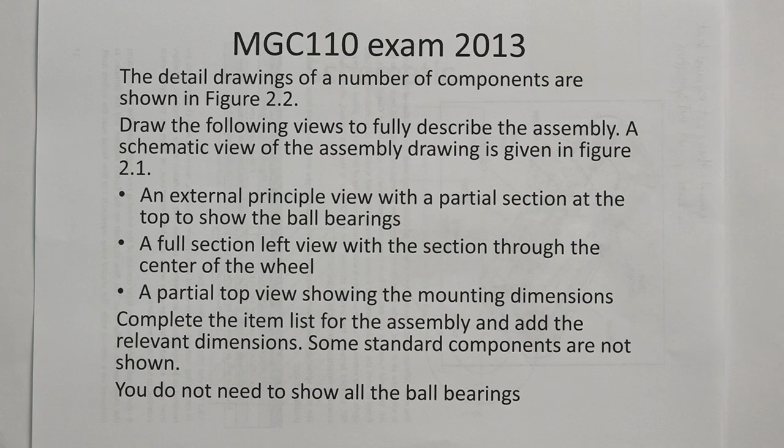Assembly example from exam 2013. So in this question they asked for an external principal view with a partial section at the top to show the ball bearings, a full section left view with a section through the center of the wheel, a partial top view showing the mounting dimensions.

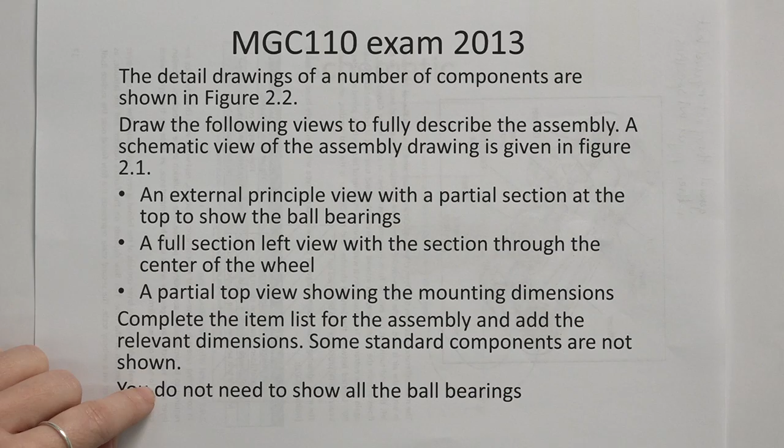They also say complete the item list for the assembly and add the relevant dimensions. Some standard components are not shown. You do not need to show all the ball bearings. Okay, so what you receive also in this exam is a schematic view of how the layout will look.

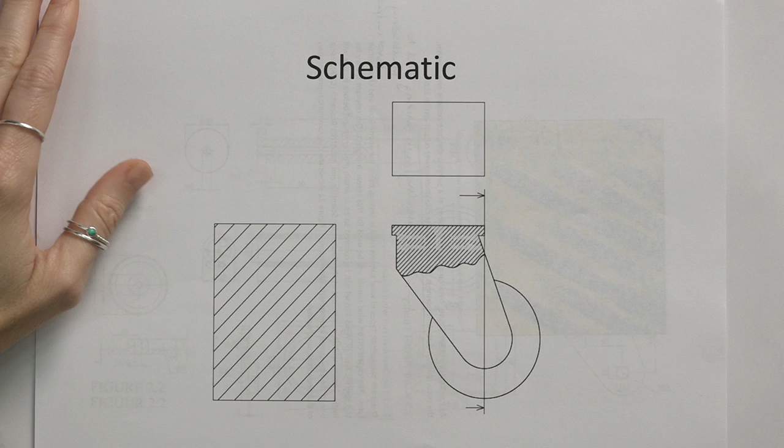So you'll have these three views that they ask for: an external principal view with partial section at the top to show the ball bearings, a full section left view with the section through the center of the wheel, so that's how they indicate where the section needs to be, and a partial top view showing the mounting dimensions. So these are the three views that we need to draw for this question. So we'll use the schematic throughout, and I'll show you how we do that.

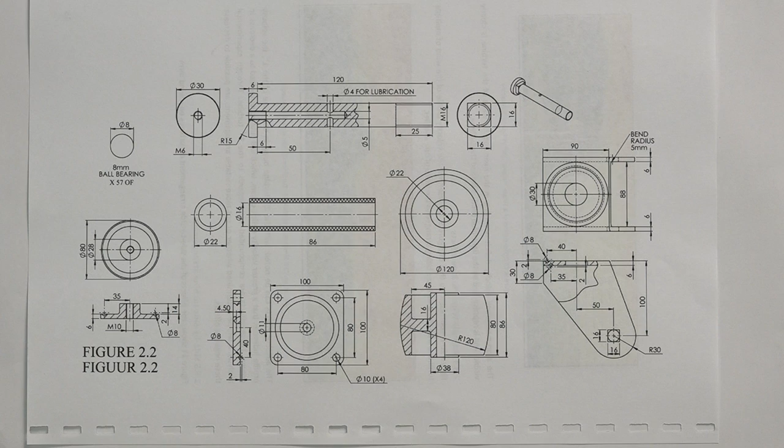But let's look at the components that we have. So the components that we have are the following. We look at the components given to you on the question, but it's important before we start to see how they combine together to identify which components belong to which components. Remember, they're always given in orthographic pairs, so either a single view, two views, or three views are given for you to see and have an idea about how these components look.

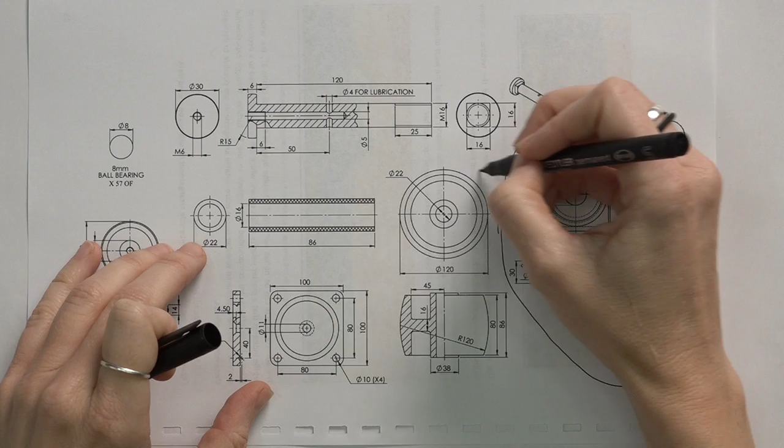So if we look at this, we can say that these two components are paired up, and they are paired up because we can see orthographically they all line up, and there's nothing to this side that lines up with them. So we have one component here. We have a second component here. And so you continue to make sure that you know how many components you have. Okay, this is just the ball bearing on its own.

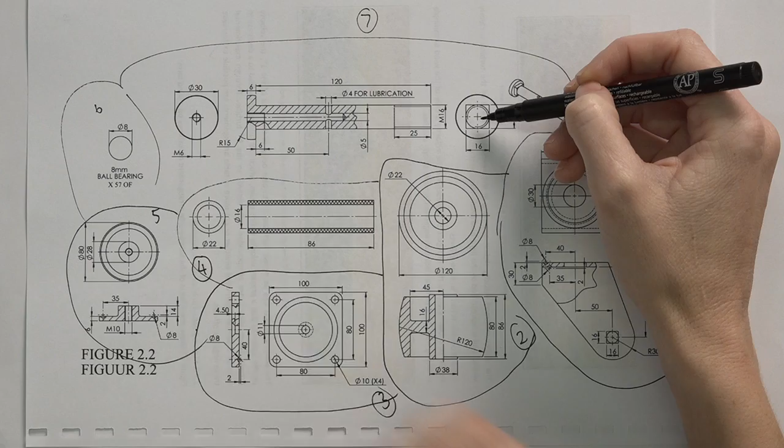And then this piece gives you an indication of how this shaft pin component looks. So it actually gives you a side view, a top and a bottom view, and it actually gives you an isometric to show you the detail of how that pin looks. Okay, so now that I have identified my different components, the second thing I can do at this stage is to say, are there standard components that I can identify that will be part of this assembly only by the components that I have?

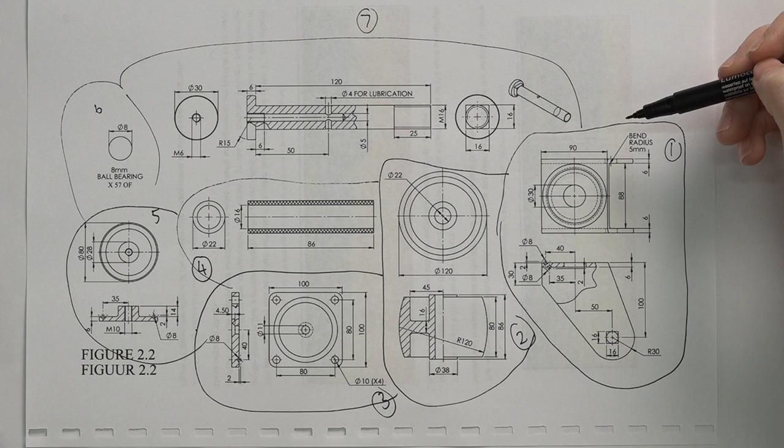Now, remember, there's a couple of things that we look for, and in this case, if we look at this pin, we see that they have lubrication holes coming from the top of the pin, which immediately gives you an indication that there will have to be a grease nipple as part of this assembly. On this side, I have threading, M16, so it might mean that I have a bolt on this side, but that's not necessarily clear at this stage, but that can be part of the picture.

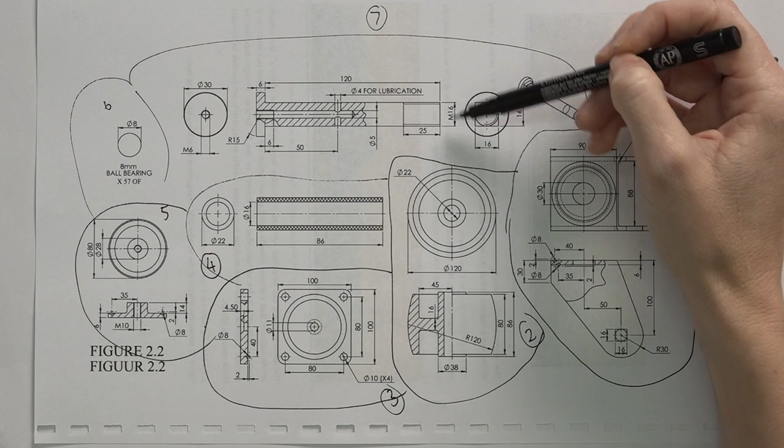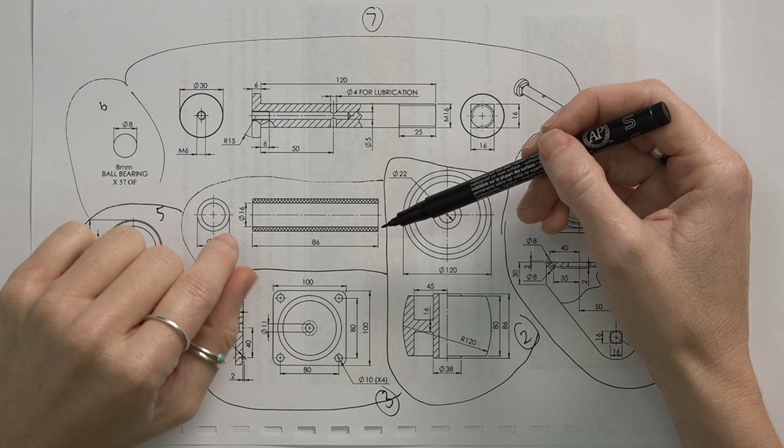But definitely I will have a grease nipple that will allow for grease to be put into this and run out through this component. Also, when I have a component where there's a pin and a grease nipple, the component that I know is associated with that is also a bushing. So most likely, just because I understand my standard components, it means that I have a bush that runs over this part of the component, and around the bush we will have a wheel.

So these are things that we can immediately say without even looking at the sizes and the dimensions of these components, that they will probably be connected because of how we understand standard components. If this is not clear to you, I would strongly suggest that you go through the tutorial about standard components again to make sure that you understand what each of these components needs.

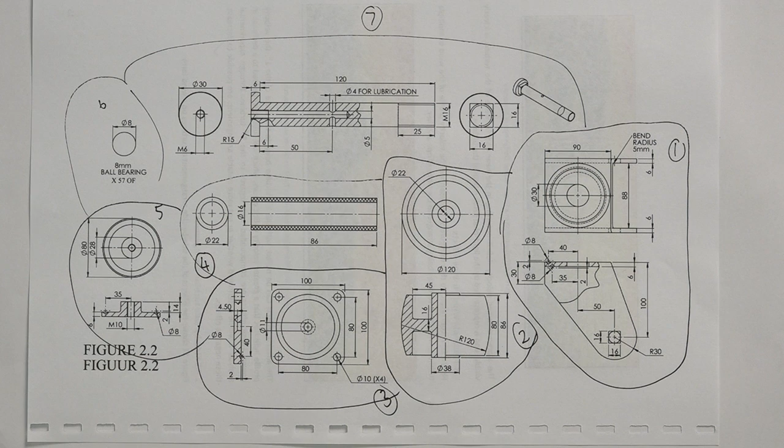Okay, so we can start at any place in the assembly, with any component. But before we start, we want to at least have an idea of how they fit together. That's what the schematic is for.

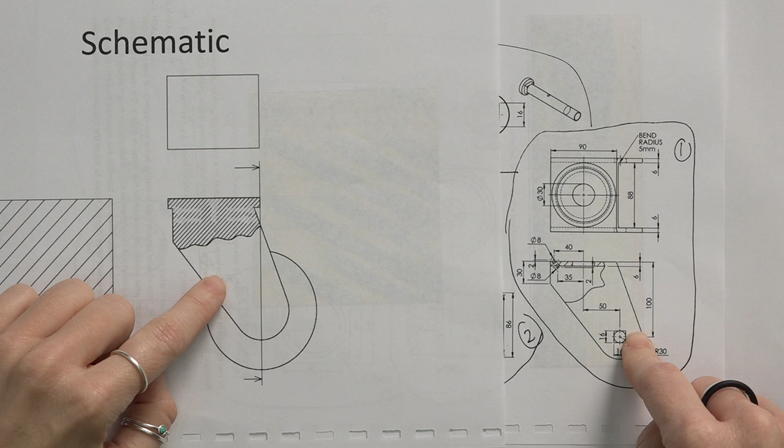The schematic gives you an idea of how the components fit together. In this principal view, you can see there's this outside housing and this wheel. If you look at this component, it's exactly the same as this, so we know it's most likely the same component. Then we have a wheel component that we see over here. We can already identify that these two will line up through this hole.

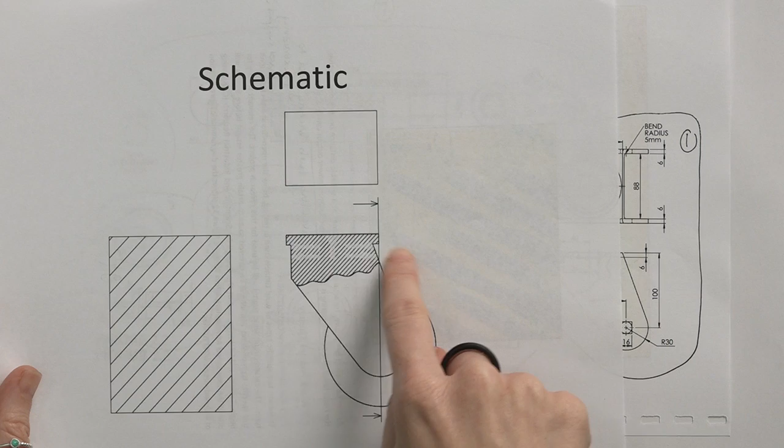At the top, we see there's a specific feature. But remember, this is also just a schematic, so this can be misleading. In this case, that will indicate something else to us, but we'll continue and see what that means later on.

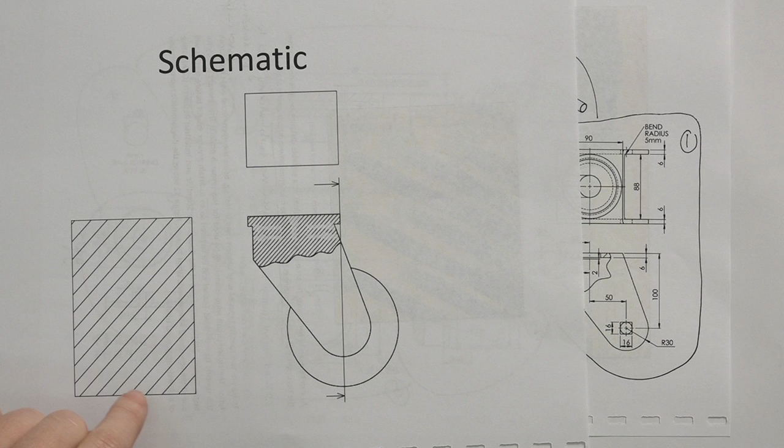Okay, so I know there's a wheel and this housing, and the section line is running through that. Remember, if I look at the mark allocation for a drawing like this, the largest portion of the marks will lie in the section drawing, so it's advisable to start first with the section drawing. I know the section line runs through the center of the wheel.

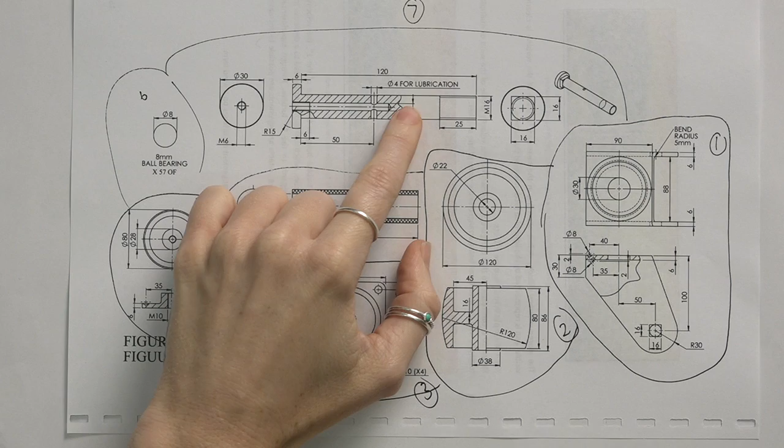So what do I know about the wheel? From my standard components, I know that inside the wheel I will have a bush and the pin. So already I have an indication of what I can start with and where to draw. I can definitely start by drawing this pin with the bush, with the wheel. But we want to double check that that actually makes sense according to our dimensions.

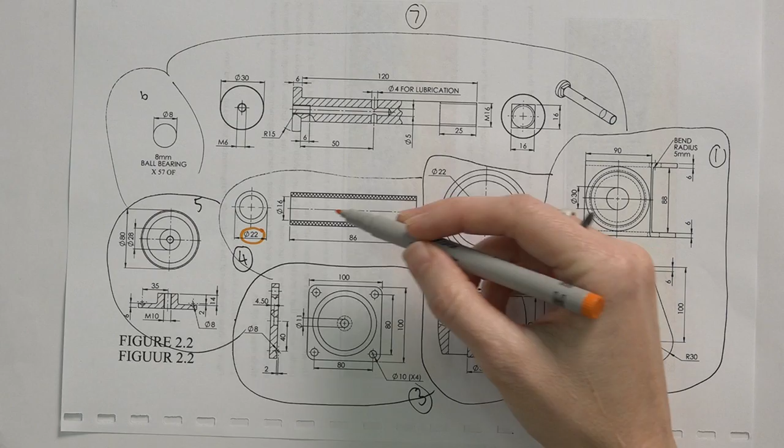When we look at the dimensions for each of these parts, we see the inner part of the wheel is 22, which is the same as the outer part for the bush, also 22. The inner part of the bush is 16, and the outer part of this component is 16. So that does make sense. The bush will fit onto this component and into the wheel. Those three components are definitely linked.

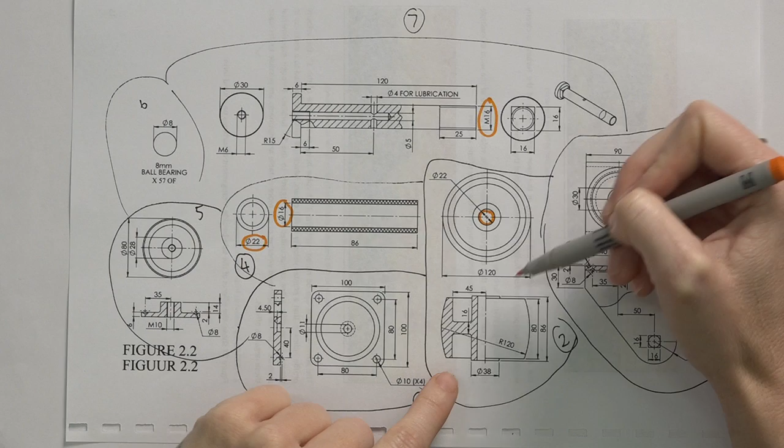In terms of length, how long and how will they fit into each other? The wheel here is given as 86, and it's the same as the bush, 86, so it will be an exact match between these two. But how these two match onto the pin - if I push them all the way against this part, it means there's 86 there, but I'm not sure where on this it will actually fit.

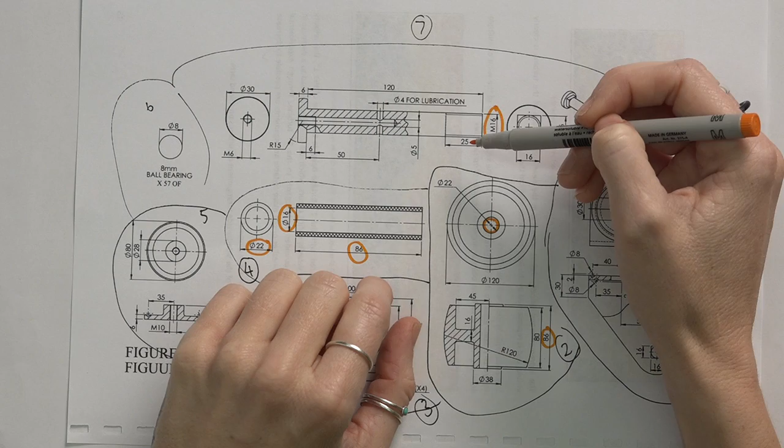I know the bush needs to be somewhere over this grease lubrication hole, so it will be somewhere over that, but I'm not sure where it will fit in general. How will I know? This is where I use my schematic.

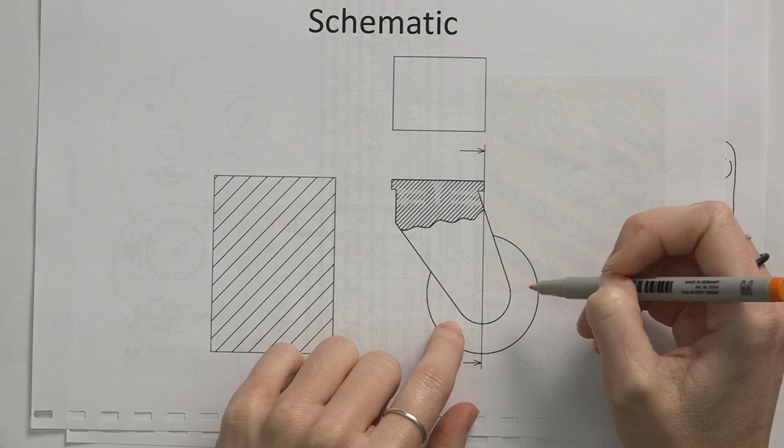On our schematic we can see that we have the housing on the outside, which means the wheel, the bush, and the pin are on the inside, and around this wheel I have this housing, which means I'll have my wheel on my bush around the pin, but between the pin head and the edge of the pin, I will have this housing that goes around this wheel.

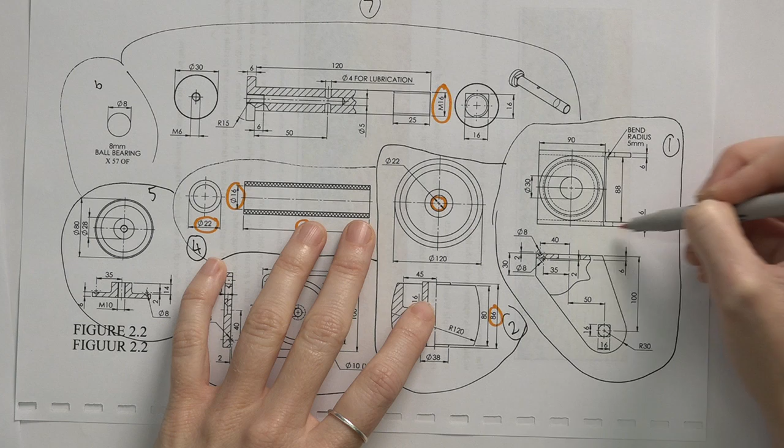The housing I've identified as this component, so here I can see this part. If the pin goes through on both ends, I can have the housing on one side of the wheel and on the other side. Is there enough space for the wheel? Yes, there's 88 here, and I know the wheel is 86, which means there'll be a small gap on either side, so it will be able to fit.

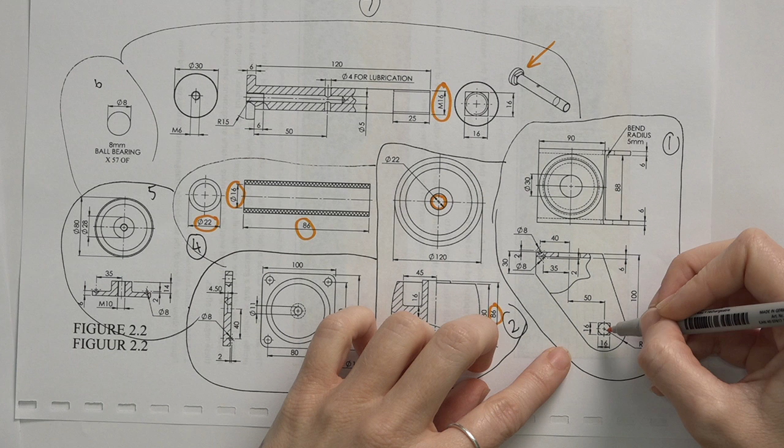Now, how does this pin fit into this housing? Does it matter? In our case, because we have a very special pin with a square head at the top, it does matter. If you look at the drawing I have here, there's a square hole and a round hole, which means there's a specific side from where I want this pin to be fitted in.

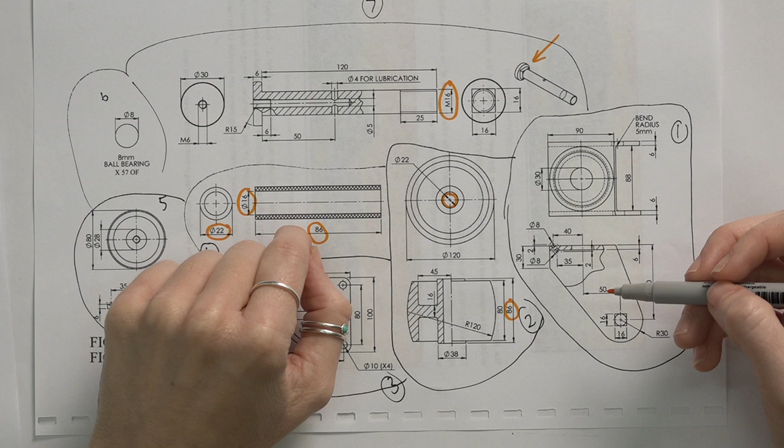I'm also making a left section view. So if I'm cutting through this and looking from the left, that would mean this pin will be put in from the opposite side. So it's not going to be orientated in this direction, but actually turned around so that this square part is on this side when I'm drawing it from the left.

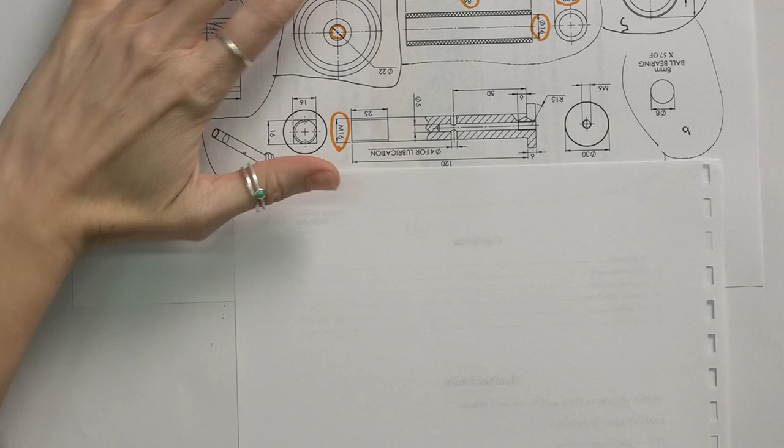Okay, let's start drawing this now that we understand how they fit together. If we start with the pin, it's easy because we know what's going to go around it. We can turn the pin around so we know how it looks, and we don't have to struggle to draw it the opposite way around.

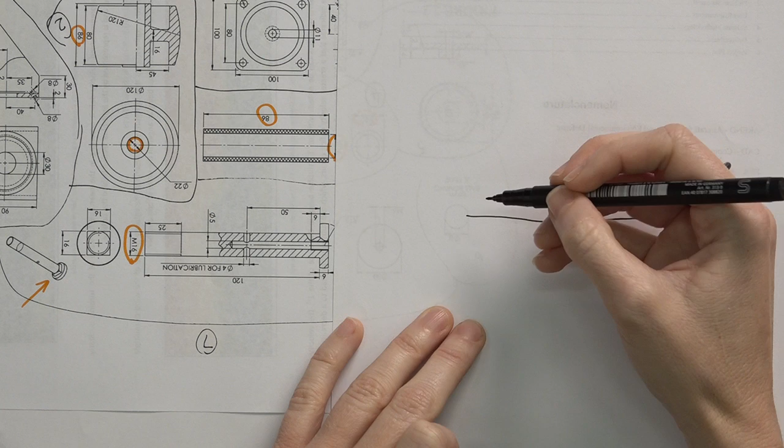So we literally redraw the pin exactly as we see it in the question. We have this long pin with a head on the end. This end section has some threading. And then I also have all this information for the grease nipple.

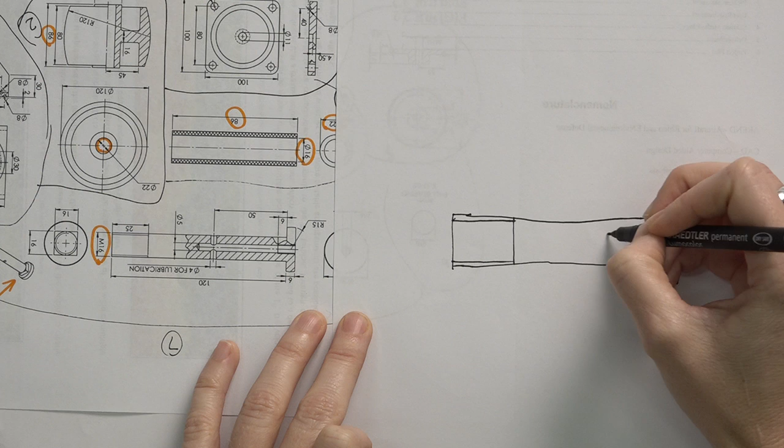Okay, with this long lubrication hole. And the sectioning, because something interesting is happening on the inside of this pin, otherwise it wouldn't have been sectioned. So we can do it exactly as we see it on the drawing, and we can already add in our center lines.

Now at this stage you can already draw in the grease nipple, because you know it will sit here, so you might as well get that out of the way. Add the grease nipple on here. And remember, when you add a grease nipple at the top, it's screwing into this hole, so there's a place where this grease nipple finishes. It's important that you remember that.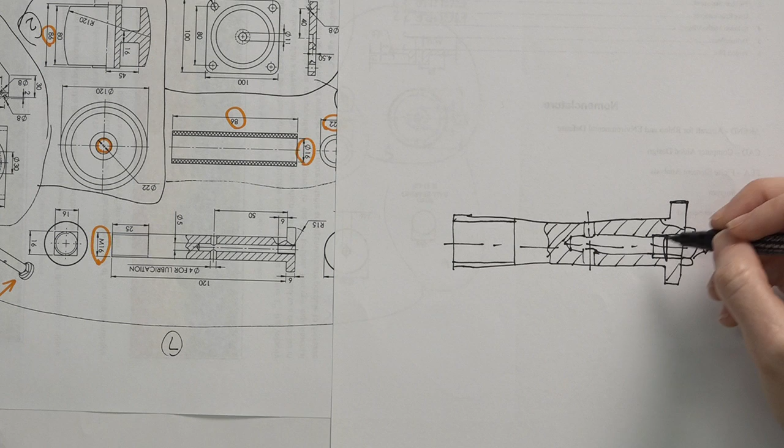So there's a place where the grease nipple ends and a place where the threading ends. It's the same as your bolt assembly. If this is unclear to you, please go look at how that works again in your tutorial about standard components. But now we've already added the grease nipple and we know we're sorted with that.

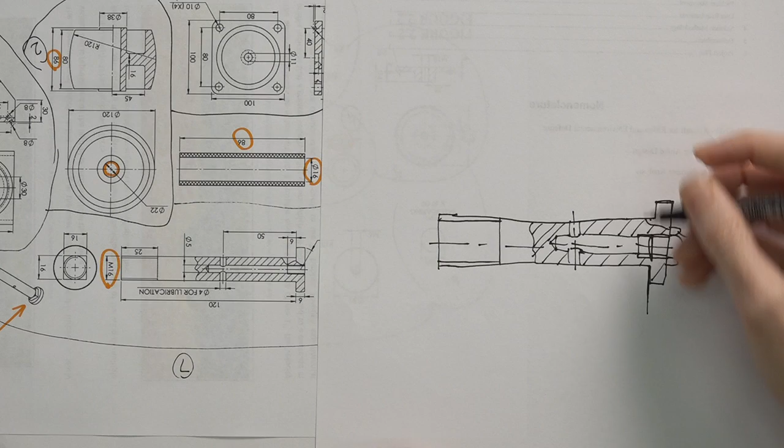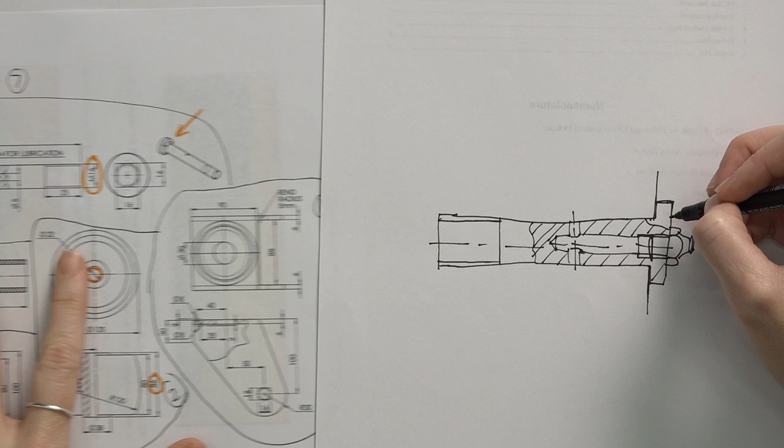Now we know we have the bush that fits around this pin and we have the wheel. But before that, we have the housing, right? So the first thing I'll have at the edge here is the housing part. I don't have to draw the full housing yet, but I definitely need this distance to gauge where my wheel and bush will sit. If I look at this housing, the distance of this side is 6. Remember you want to be proportional, and the top part, this head, is also 6, which means this part will also be 6.

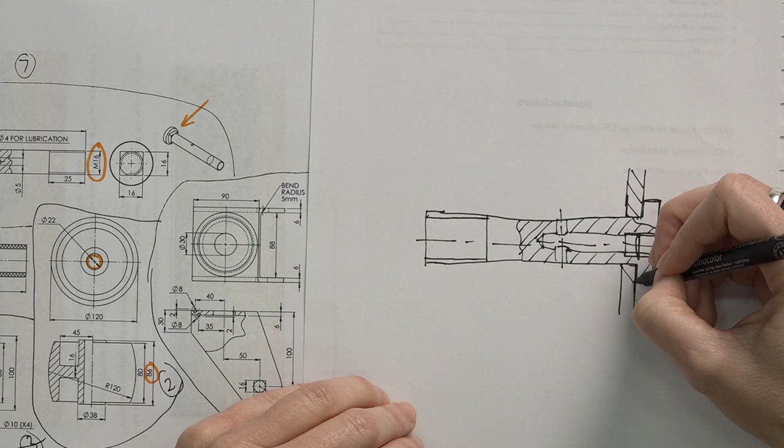Are these diameters exactly the same? Remember there's a 16 here, and yes, it's also 16 here, which means they fit exactly on top of each other. So my housing will look something like this. I don't need to finish it at this stage, I can just put it in now and finish the inside later to see how the rest looks. But at this stage you can already say, I know how it will look because I'm sectioning through here, remember, through the middle of this component. So at the bottom part there'll be a short bit.